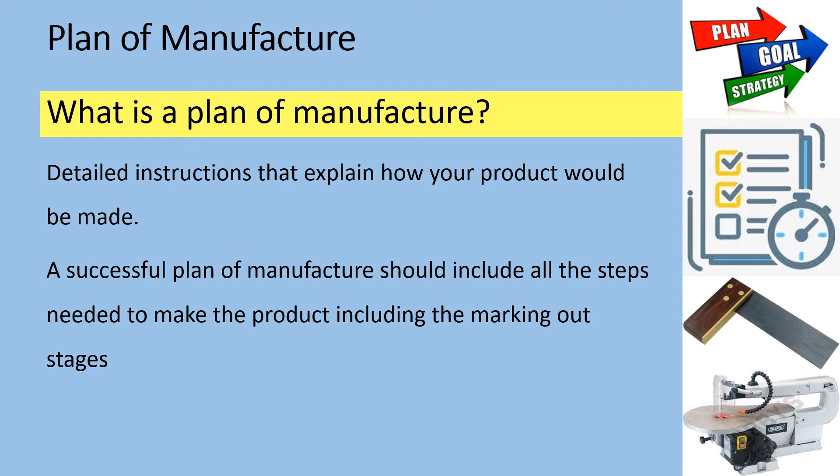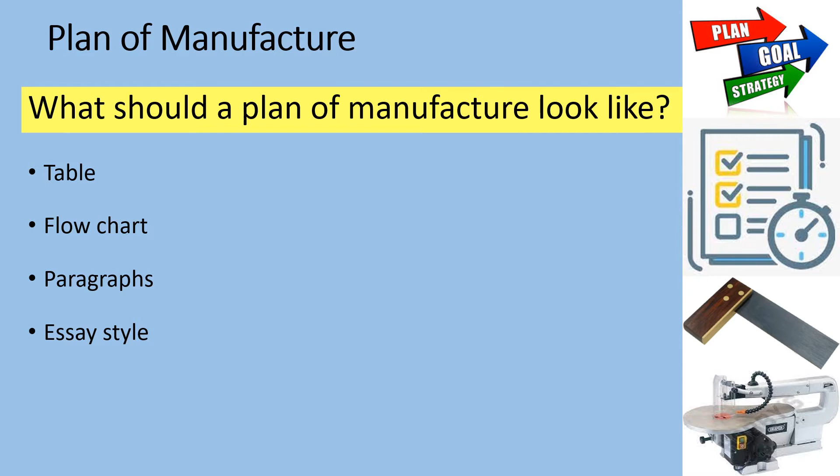So what should a plan of manufacture actually look like? It can honestly be displayed any way that you see fit, any way that you see comfortable, but my main suggestion would be to lay it out as a table with rows and columns, just because it makes the information far more clear, and it helps you to keep track of what you have already written. But in the past, students have also written their plan of manufactures as just paragraphs, similar to an essay style of writing, or a flow chart as well. But it is completely up to you, though I would highly recommend the table.

So as I stated previously, I would highly recommend that you lay your plan of manufacture out as a table, just because it makes the information really clear and easy to read, but it also helps you to keep track of what you have already written. So this is an example of the columns that you can include. You can take some out, you can add more. Again, it is completely up to you, as long as you have clear information as to how you would make this product if you were in a workshop setting.

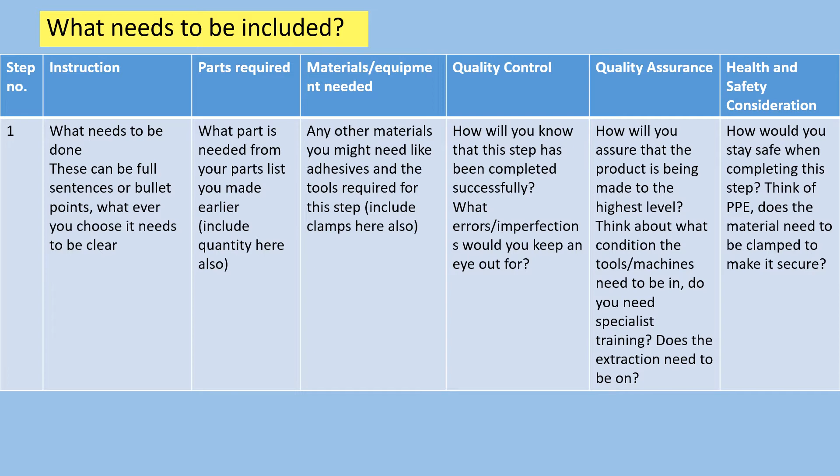What I'm going to do is go through each column to explain what I've put and why. So the first column is just steps and numbers, so the order in which these steps would be followed. The second is the instruction, so this is just the information that says this is what you do here. It doesn't need to be big full sentences, but it can be. Traditionally, short, brief sentences or even bullet points. Again, it's however you feel comfortable laying out this information.

Next would be the parts required. For this one, you can refer back to either your final design or your parts list if you have one. It's just to help keep the information clear, because the idea of this plan is you can then hand it to anyone and they will be able to make it. So think about an IKEA flat pack or any flat pack furniture that you may have built in the past. Traditionally, for each instruction it says you need part A, B, F, 3, etc. So it just helps to keep the instructions really crystal clear and the flow of the manufacture at a really good pace.

Next is the materials and the equipment that you need. So this obviously includes the material that you're making your product out of, and it also includes the equipment that you would need for that specific stage of the process.

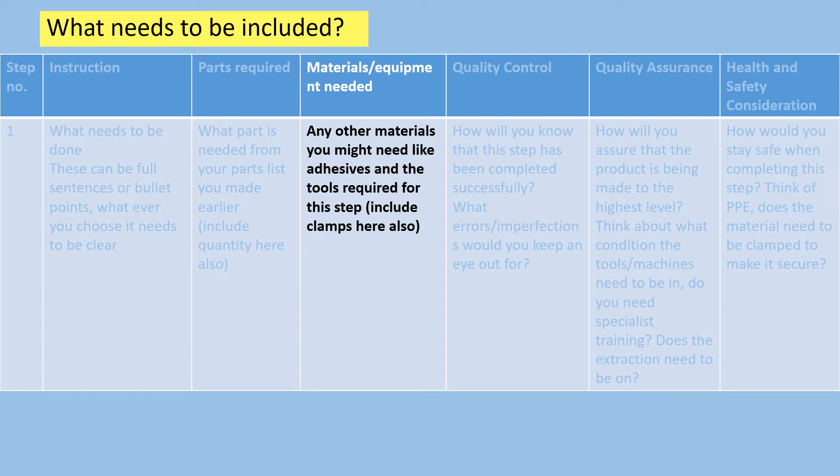Quality control is all about what will you look for in the product once the step is completed. So for example, if you've just written about a step where you've used a fret saw to cut your pieces to size, once you've cut those, what will you actually look at? What would you look for in order to check that your work is okay? A really clear example of this is, once you've used a fret saw, you might want to actually measure the piece to make sure you've cut it to the right size, and maybe you've not gone in too far into your pencil line, or maybe you've not left a bit too much waste, which you then need to sand off.

It could be that you just visually assess it to make sure it looks okay. It might even be that you just check the edges to look for any really rough marks or rough saw marks, which again, you'll sand out later.

So it's just looking for any imperfections or errors before you continue on to the next step. Traditionally, if you have cut the pieces to the wrong size, or if you feel like there's too many imperfections, you would start this step again. So that's the whole point of quality control, is to make sure that the product you're making is being made to the highest of qualities.

Quality assurance is really similar to quality control, except quality assurance isn't about checking the product itself. It's about the actual stages, or the whole process, of the manufacturing process. For example...

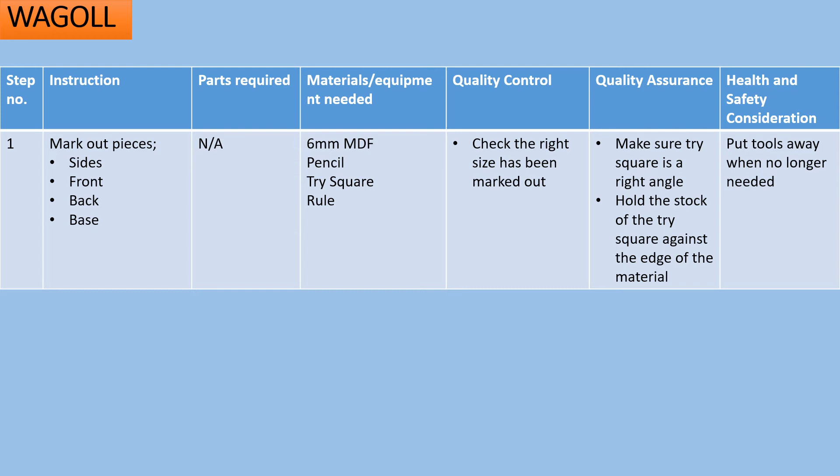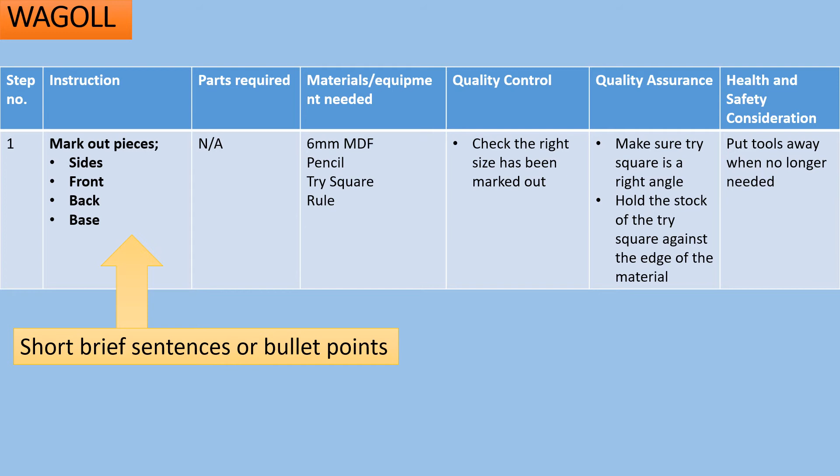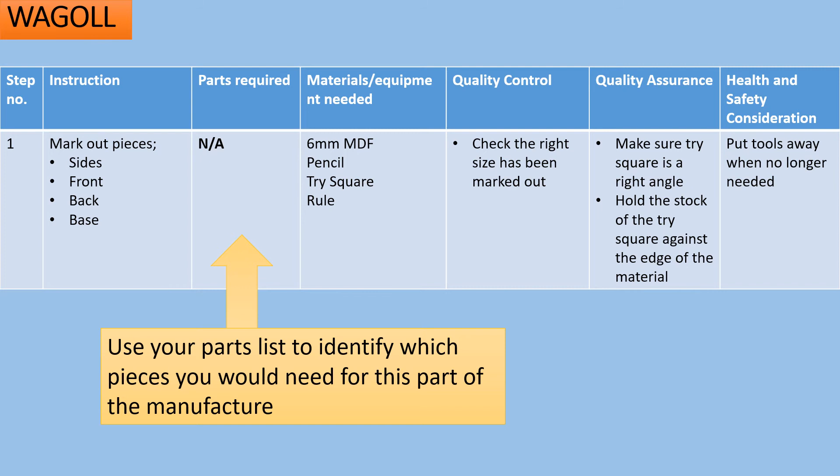So I'm going to go through each one by one for you. The first one is obviously the number step, so step number 1. Next we have the instruction - I've simply put 'mark out pieces'. And then I've stated sides, front, back and base, because they're the pieces that I'm marking out. For this, I have no parts required because I haven't made them yet - I'm cutting them out - so I've put NA, not applicable. But you could just leave it blank, you don't need to put NA.

I've stated the materials that I need, so I am using 6mm MDF. I've stated the thickness there - that's really, really important. If you're using pine, oak, plywood, acrylic, aluminium, whatever the material, don't forget to state the thickness of it.

You don't have to necessarily state the size because that might be mentioned elsewhere, maybe on your final design or your parts list, but you do need to state the thickness of the material, so that if anybody is following this, they all know the thickness they require.

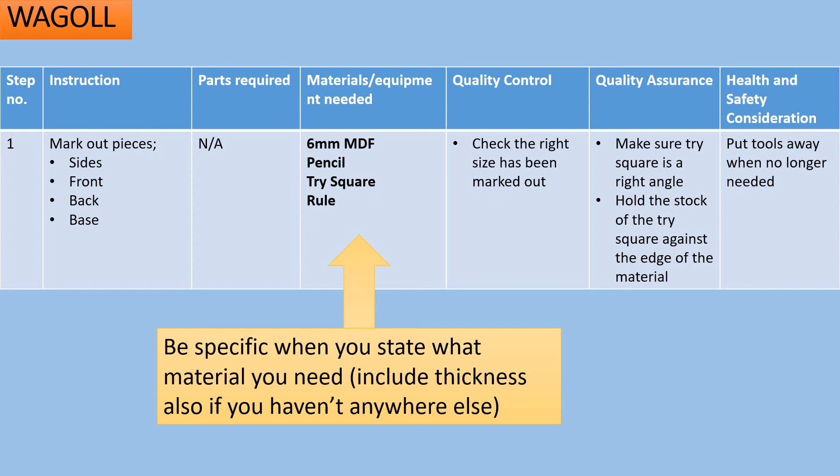And then I've just put the tools I would need. So for marking out, really simple: a pencil, a try square, and a rule. Nice and easy breezy.

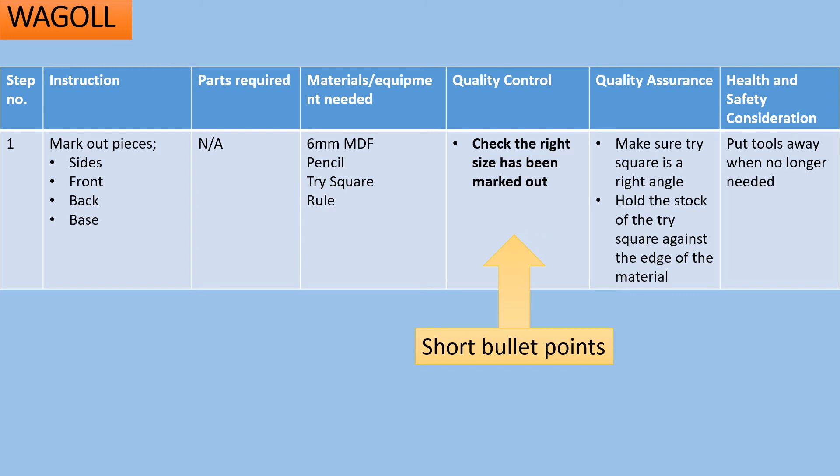Quality control: check the right size has been marked out. That's it, that's all I need to do. So once I've marked out all those pieces, I'll just measure them again to make sure they are the right size. That's all I need for quality control.

Quality assurance, again really short bullet points here. Make sure the try square is a right angle, because that's the whole point of a try square, it gives a 90-degree angle. It means that whatever lines you mark away from the edge, they will be vertical or horizontal, and they'll be accurate. The other area of quality assurance, to make sure my pieces are drawn accurately, I've stated: hold the stock of the try square against the edge of the material. So it's just a reminder of what you need to do, to ensure that the piece I mark out here is accurate and I have nice 90-degree edge lines away from the edge. Really nice and simple, short bullet points.

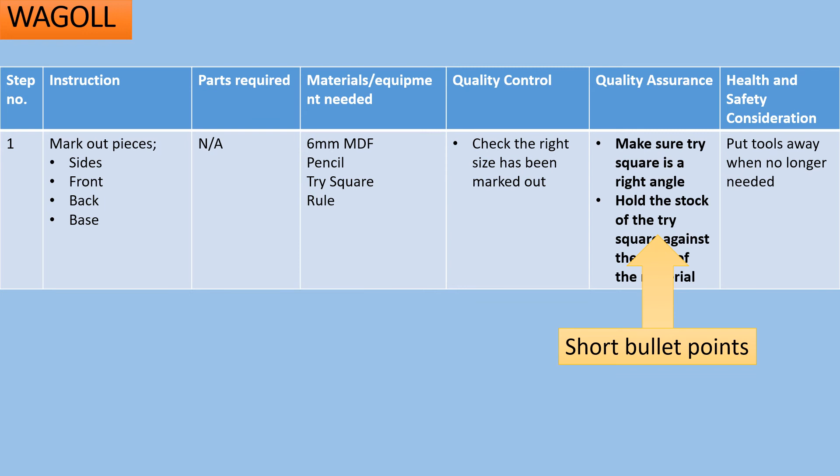And then finally, the health and safety considerations. I'm not using anything sharp, I don't need to worry about PPE at this point, I don't need to worry about anything. So all I've done is think, what would Miss nag me to do if I was in the workshop? Put tools away when no longer needed. Boom, that's it, that's all you need to do. Put tools away when no longer needed. Like I said previously, it doesn't need to be huge essays, doesn't need to be full sentences. Really short, to the point, not very technical, but it's accurate and it helps to keep you safe.

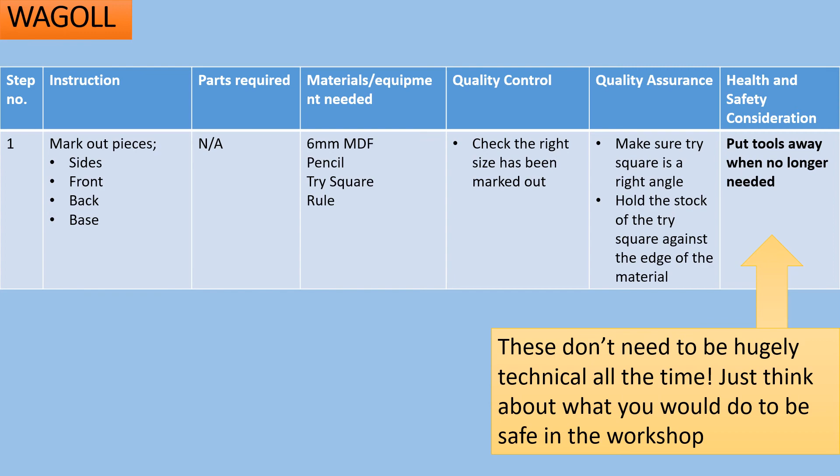So one of the most common questions I get is, do I need to write about absolutely everything? The answer is kind of yes and no. You should write about all the stages of your manufacture. However, you might have two or more steps that are the exact same, and then it makes it quite silly if you're just duplicating all that information, if you're just having to write it out twice again.

So if we look at this drawer, for an example, on the right hand side I've got 3 drawers there. Now, I'm pretty certain that when I go to make them, they will be the exact same. So instead of saying in my manufacturing plan, drawer 1, mark out, measure, blah blah blah, drawer 2, drawer 3, I could just put: for drawer 1, 2 and 3, I would follow steps and whatever numbers they are. So I just state these are the instructions I would follow for the drawers, instead of having to actually write out each step 3 separate times. It just helps with your workload and also helps to minimize the amount of writing you have to complete as well.